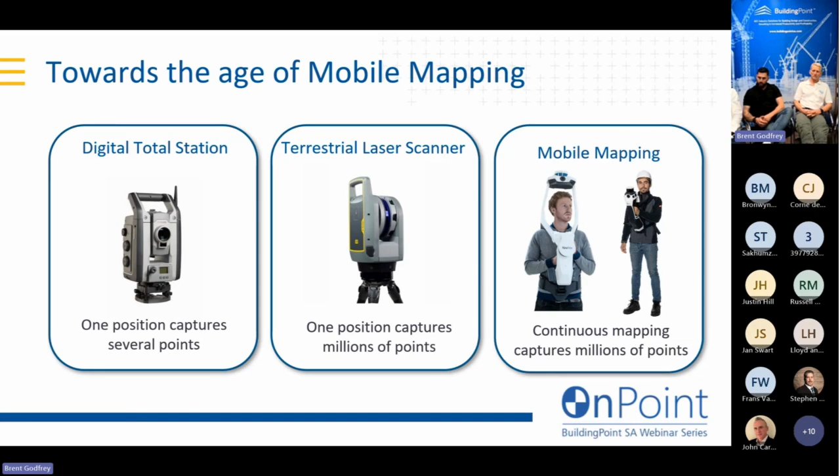I'm going to hand over to Sven, and he'll take you through their latest and greatest in that space.

Just quickly, I think it's actually quite a unique opportunity being here with a reseller and a customer. It's the first time I've done one of these with a customer sat next to us, which is great - it'll be good to see what you guys are doing a bit later on.

What I wanted to talk about over the next few minutes is that NavVis, going back to 2012, has been focused on delivering mobile mapping solutions, a lot of which you'd know, specifically around wearable solutions. The NavVis VLX2 and VLX3 are wearable devices that allow you to scan very quickly through your environment. Part of the identity and brand of NavVis was always to produce data quality more comparable to terrestrial laser scanners than what you'd expect from traditional mobile mapping systems.

Over the last 18 months our design and engineering teams have been working on a new product, a new segment, trying to compete within the handheld space. Over the past 10 years handheld scanning has become a lot more applicable specifically within AEC - you want to be able to move around these environments fairly quickly, and they're often quite small and confined.

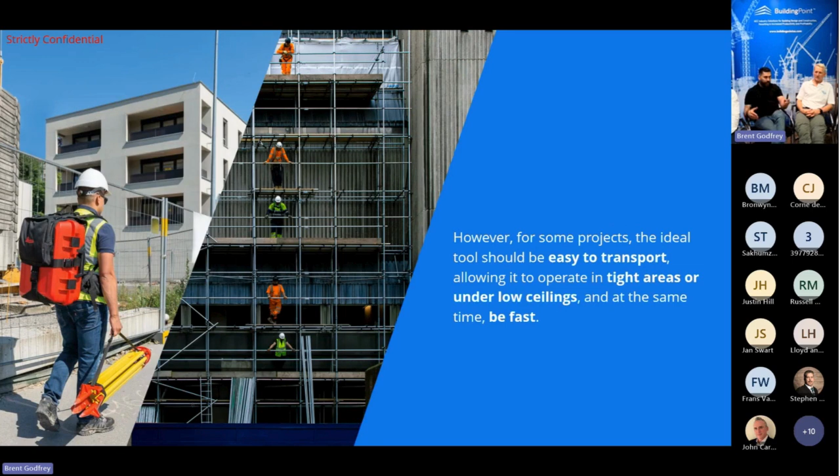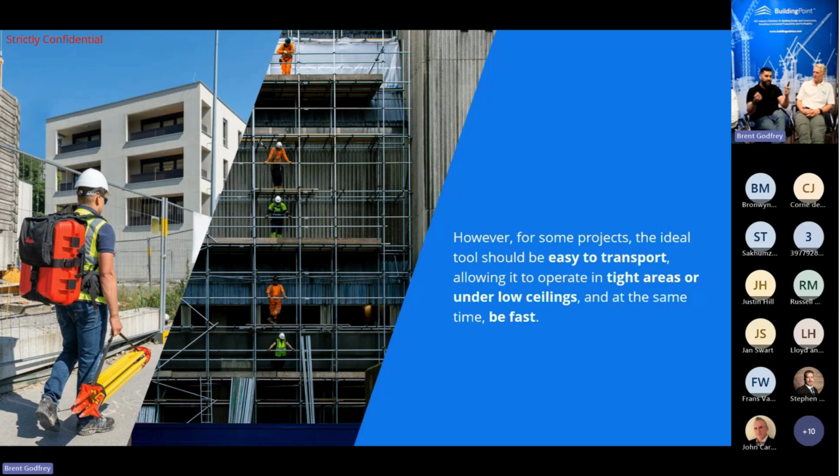However, some of the products in the LX series, the VLX 2 and 3, for some projects the ideal tool should be really easy to transport, quite dynamic to move around site, and pretty easy to use scanning in tight areas, as I mentioned earlier, AEC type projects. These are tight areas with a lot of complex features within the environment, but you still want it to be fast. You want to scan quickly on site, leave, get your data processed in a usable format, and hand it over to your clients. And the VLX, however being a really fast and robust tool, doesn't give you all of that dynamic ability.

So other companies and competitors have tried for years to meet two fundamental standards: scanning at speed and being dynamic, whilst meeting the data quality and standards you'd expect from your hardware. You guys paid a lot of money for these tools, they have to do the job you expect them to do. However, a lot of these other devices have kind of failed. You always have to sacrifice one for the other. If you're being really fast, you're probably going to lose a bit of your data quality and accuracy. If you're trying to produce really accurate data, you're probably sacrificing on speed. So where's that middle ground? I think that middle ground is what sets apart a really professional device from the compromise.

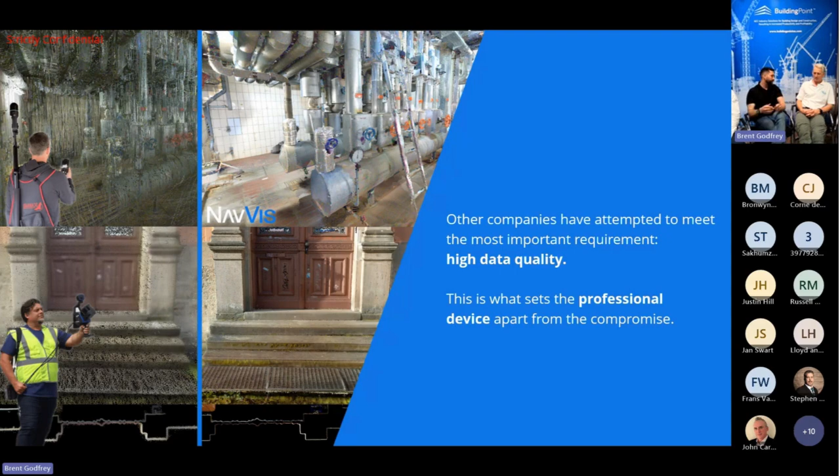So what we have done over the past 18 months is focus on trying to redefine the handheld reality capture market. Can we produce a product that gives you the benefits and value of speed, agility and dynamic scanning, but without sacrificing on our data quality? And that is where we have come to now with the NavVis MLX.

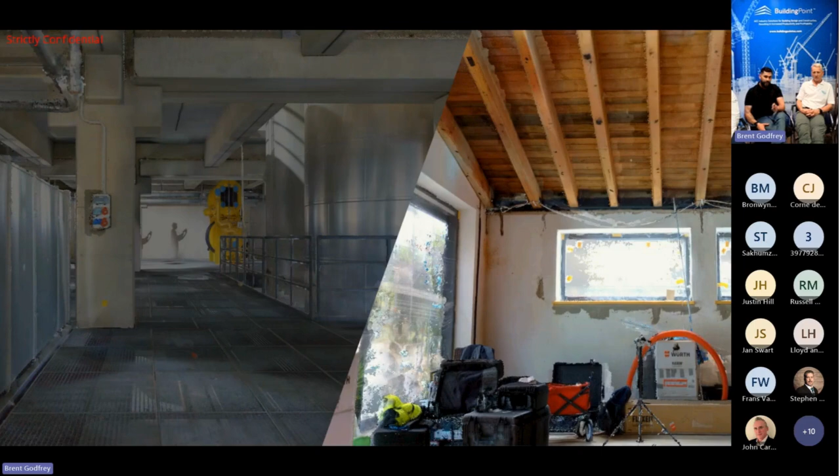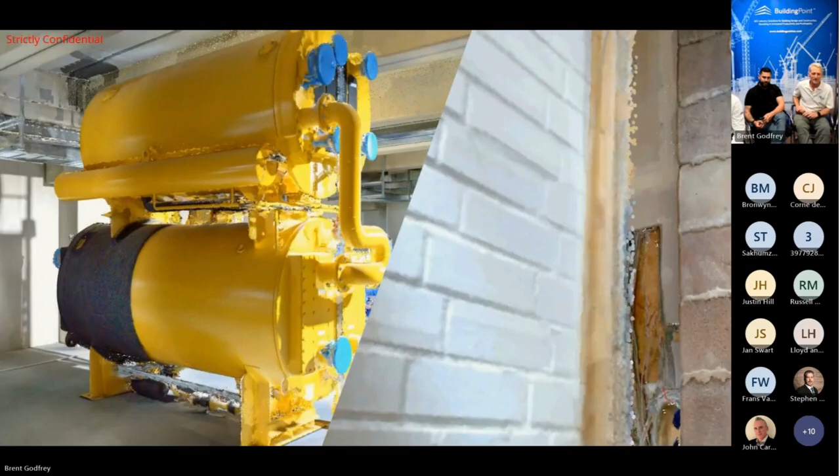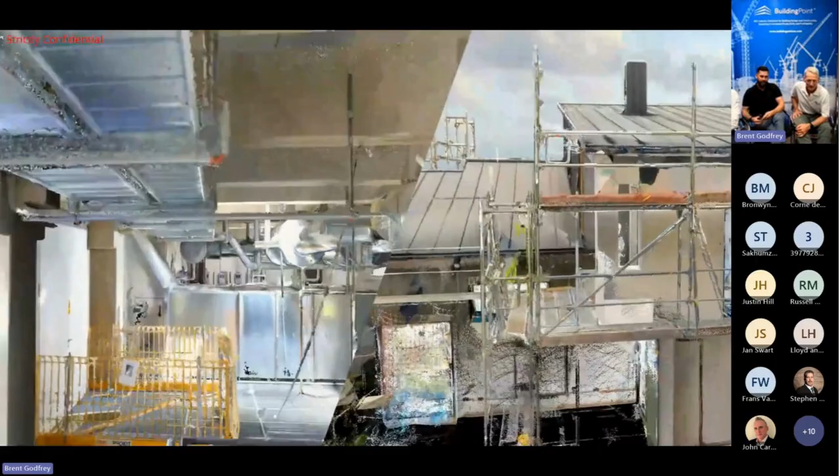So you're a user, left screen, right screen. Can you tell me which screen is a VLX or an MLX? We'll win a prize. MLX. I think left screen is VLX. That is just so good. Left screen VLX, right screen MLX. Oh no, that's just it's such good data. What's the vote? You are left screen VLX. Yeah, left screen. I think I'm going right screen VLX. I can't tell the difference.

So I'm going to happily tell you that none of you won a prize because you're all wrong. Both those screens have actually been captured with the MLX. So that kind of tells you, yeah, boom. That solidifies the story, right? We are producing products that produce incredible data quality, so hard to tell the difference between a VLX and an MLX when it comes to data quality comparisons. But I need to be clear that those two products, the wearable solution and the handheld one, are still fit for purpose. And I think you probably know this better than most - not all scanners can do everything. You need the right tool for the right job, and that's where the LX series becomes a line of products that helps you achieve those data quality results you're looking for.

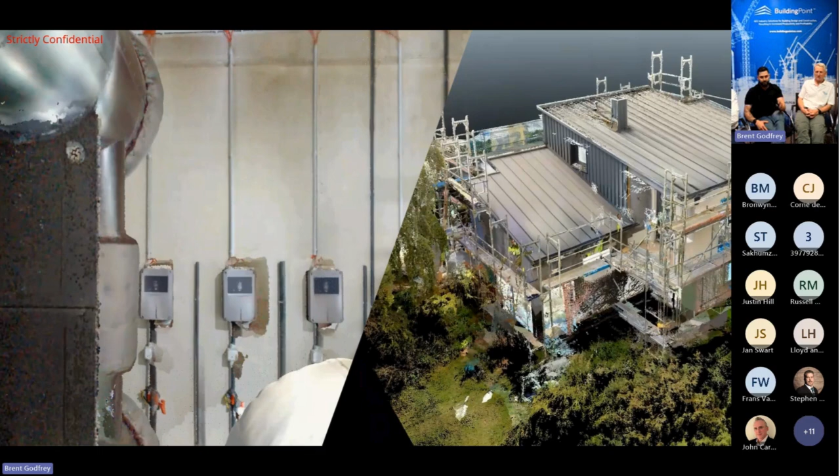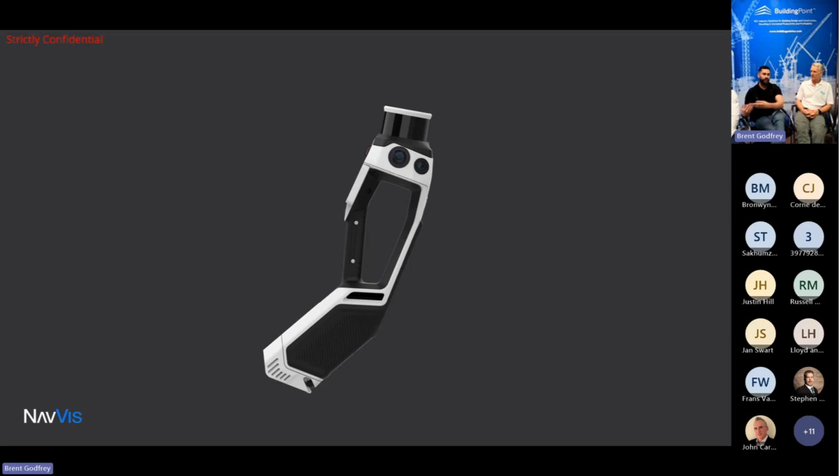So there it is, that is the NavVis MLX. That was launched in the first or second week of September, and shortly after that our major launch happened at Intergeo 2024, which took place in Stuttgart this year. So it's a product within our family now. It is a handheld solution that complements our VLX products, and our VLX products themselves complement the NavVis MLX. As I said earlier, this is absolutely redefining handheld reality capture, producing results that are extremely fast, but at the same time incredibly reliable.

So we can talk through some of the technical features. I know you guys as surveyors love to read into these details, and I think it's important that we do. But it is absolutely high quality data. We've got a stable 32-layer LiDAR sensor, some industry trusted SLAM software. NavVis has produced our own SLAM algorithm since 2012. It's trusted, it's reliable, it's dependable. You've seen the results before.

Exceptional point cloud quality from a handheld device. I think that previous slide with the side-by-side comparisons shows that there is not a single handheld device on the market that can produce that level of data quality and accuracy.

Obviously, to make that a lot more usable, you need some visual reference or some visual context. So we have 4 cameras producing high resolution 270 images. You can create a 360 pano if you lift the device above your head. Obviously, you don't want to capture your face in the photo, so lift it above your head.

However, we do have a fairly unique feature within the software that basically, if you're not taking a 360 pano and you are in the image itself, we remove that image automatically and we replace it with point clouds, so that you're not constantly in the scene. It's quite a unique feature. It's really helpful if you want to move around the environment quickly and not carry on having to lift the device above your head.

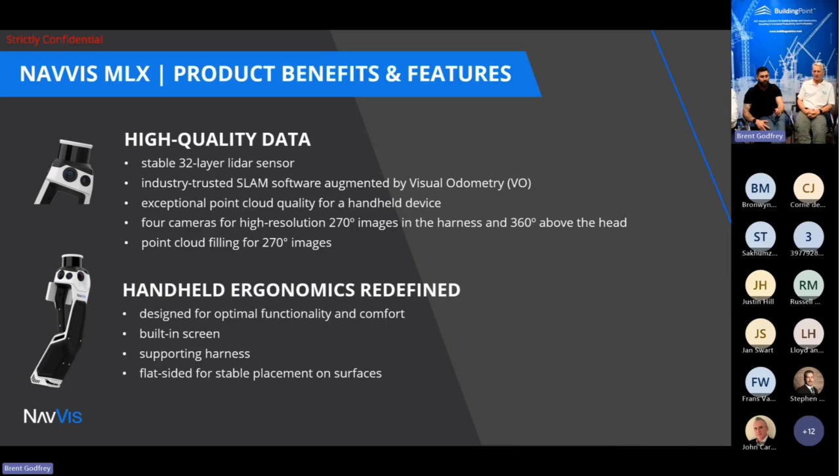It has been designed for flat-sided placement on surfaces. It sounds really trivial, but to be able to put the device down and know that it's secure, not going to roll off tables, is actually quite important. These are tools that you spend a lot of money on.

So, limitless mobility. As I mentioned earlier, this is now a compact device, which means that you can easily move this device around from site to site. It comes in a backpack. You can easily get this product into your hand luggage. You can move around very quickly. It is incredibly comfortable. The backpack itself, it's like walking around with your laptop bag.

You can get to site fairly quickly. You can go trains, planes, bikes, cars. We have a handheld luggage on flights. And then at the same time, you also get your hard case, your protective hard case in case you need it.

And then one of the really great features about NavVis tech, and we've brought these same features into the MLX that was on the VLX, is your geo-registration. So your ability to actually measure and control on site, which means that you're just creating a much more reliable and much more accurate result. That exact same feature has been brought into the MLX, which means that the consistency across all products is exactly the same.

And then you're ensuring complete coverage, as I mentioned earlier. The built-in screen, specifically if we think about users that aren't incredibly knowledgeable around the use or the understanding of survey, right? Often you want to give these tools to people to really quickly collect data, right?

So let's go into some of the specs itself. Without getting overly nerdy, the sensor is using a 32-layer laser scanner, a sensor called Hesai, and we are producing or collecting about 640,000 points per second.

We have those 4 12-megapixel cameras with the point cloud filling for the panos in case your face is in it. One thing that the MLX is doing that the VLX isn't doing, because the VLX has 2 sensors, we have incorporated 2 additional cameras on the MLX, which is called visual odometry.

So what that is doing is using visual features in the environment to supplement the SLAM. Those two additional cameras are not producing any data that comes into your final result. We don't process those images. It's purely there to add some additional robustness and redundancy to the SLAM to ensure you're getting an accurate result.

Current goal is 8 millimeters or less. We have an accuracy white paper that will be produced in Q1 of 2025, individually verified. We don't like to produce these things ourselves, but 8 millimeter accuracy on a handheld device is pretty decent. And then, like I said, we support adding control points using the same technology that came from VLX.

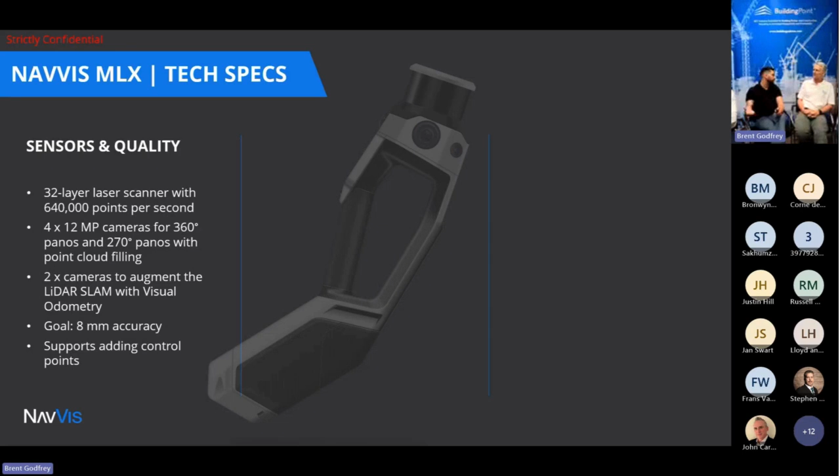Usage: on a single battery, over 45 minutes of continuous scanning with a standard 98 watt-hour battery. We do actually include a second battery, keep it on charge, and pretty much scan all day if you're cycling through these things. 10 hours of scanning with 250 gig external storage. 10 hours of scanning, and if you think about you moving at the same time, that is a lot of data. That is a big old environment.

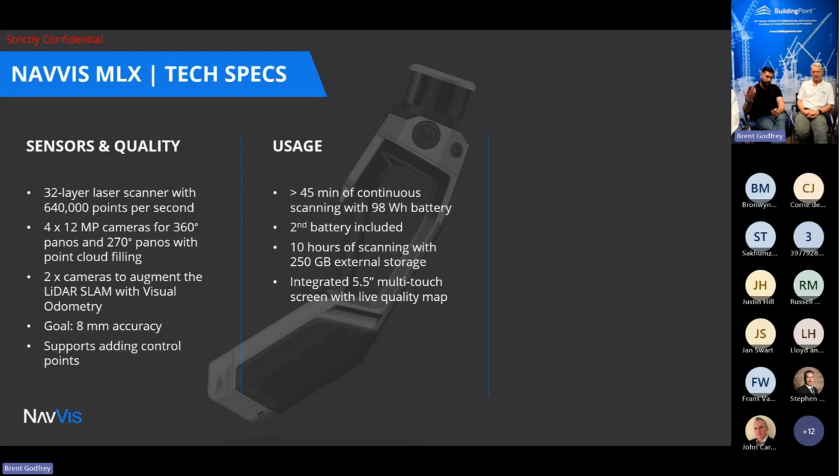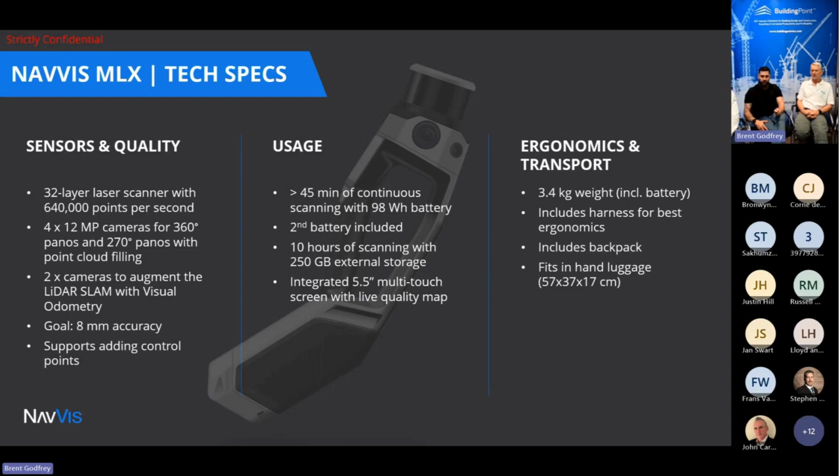And then the integrated 5.5 inch touchscreen, which is built into the device itself. Weight, just under 3.5 kilograms including the batteries. It actually includes the harness for comfortable mapping. Obviously the backpack is included so you can transport around, and then obviously the heavy transport case as well. So that is the short and sweet of the NavVis MLX.

Obviously, the BuildingPoint guys have their unit here already, which is exciting. Yeah, to get our hands on it. Yeah, I think I'll hand it back to you now, Brent.

Thanks very much, Sam. So I think we've now heard from the manufacturer. I think now it'll be always good to hear from the user, and fellas, if it really does say if it does what it says on the tin. And it'll be nice to hear from Ian just what he does in his business, how he has one of the VLXs and how it's improved, what value it's added to his business and what value it's added to his customers as well. So yeah, thanks Ian, thanks for joining us.

Thanks, Brent. We're a Cape Town-based firm of land surveyors in South Africa. We've been in this part of the world for the last 50-odd years with a proud history of traditional surveying, with a high commitment to accuracy and innovation and professional advice to our customers and clients. Obviously, as a firm of professional land surveyors, we cover the full spectrum, cadastral, sectional title, and onto the construction engineering side of it, putting in the as-built plans and completion certificates and signing off. So we do the full spectrum.

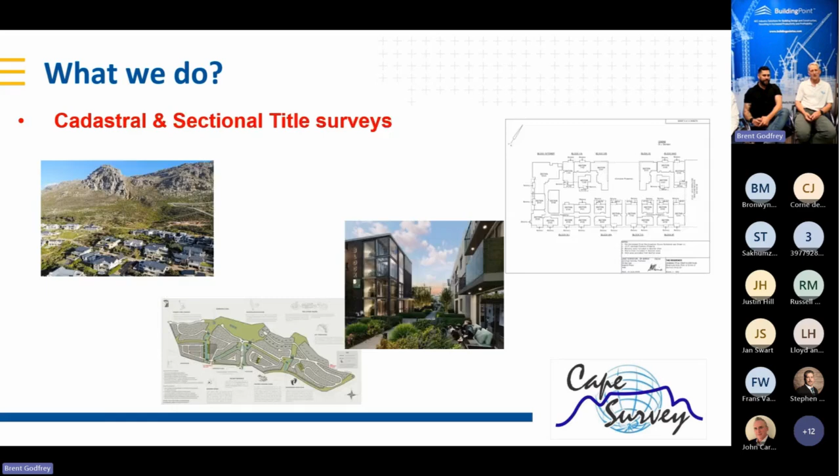We've realized in this that there are more advanced technologies coming out, and we've moved from the traditional theodolite, the steel tape, inverted image, through to this wonderful GPS side of things. And then later we've realized that scanning plays a really important role. That scanning we utilize both in the topographical and site surveys. With construction these days, it's so important to get as much data as possible, get it as accurately as possible.

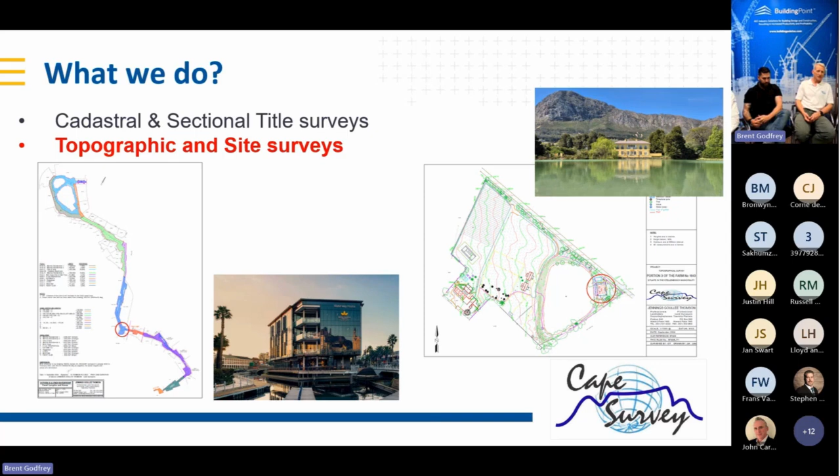With construction costs rising, it's exceedingly important to get this data over to the guys who are going to make the decisions on what happens on site. And scanning is the natural choice of going ahead and capturing as much data as you can, from the design side leading out into the construction and setting out of the new build that needs to be done. That is exceedingly complex these days with really difficult sites that we work on. And once again, using the right technology to get the stuff out of the ground correctly and set out correctly first time is just so important.

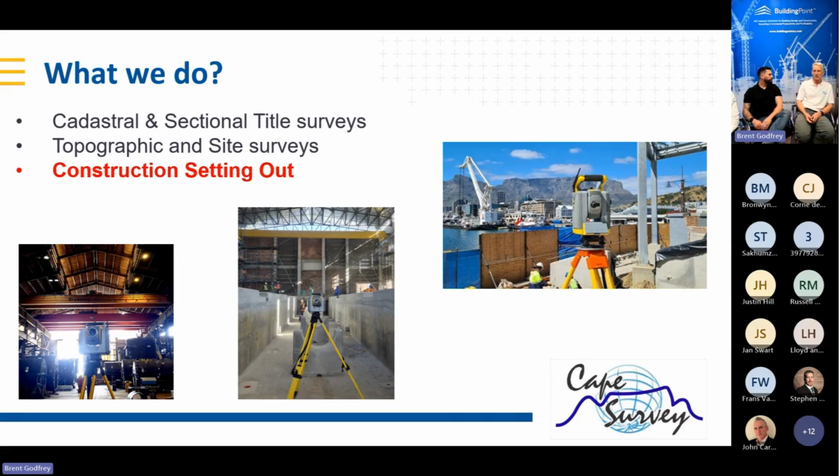This setting out for construction then leads us into the verification that the good old contractor has thrown his concrete where he is supposed to have thrown it. That verification can go from a whole building where all the elements are identified and extracted and compared to the design positions, to your traditional floor flatness scanning, where we reduce the point cloud to every 100 mils instead of every meter, and generate floor flatness plans, which one can see if it meets client spec or whether it needs remedial action to sort it out. And then our little problem child, every site has a lift, and they managed to get them wrong.

So verticality analysis, see if it's going to work. The lifts, as you know, are ordered many years before the project, and now it doesn't fit. So yeah, lifts are one of the real bugbears on it.

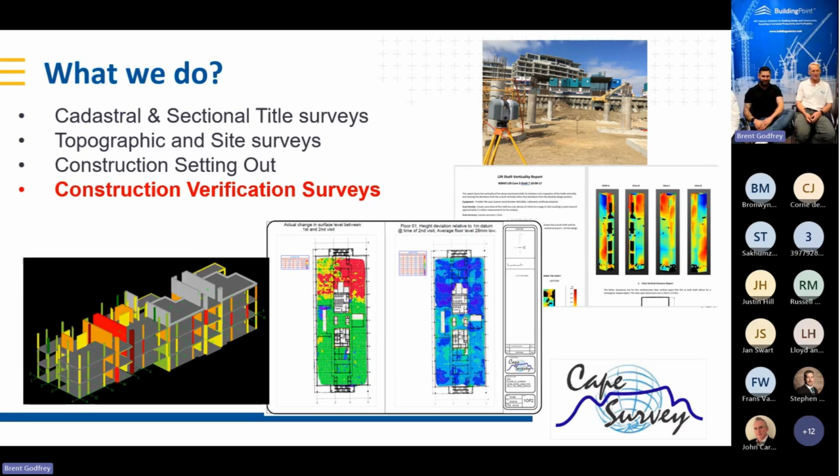The scanning also helps us with the volumetric surveys, which we do with stockpiles, and the budget being what it is these days, it's just more and more important that our client gets the right volumes, and the only way of doing that is to scan it. The old days of running around with a theodolite and taking a few spot shots don't cut it anymore.

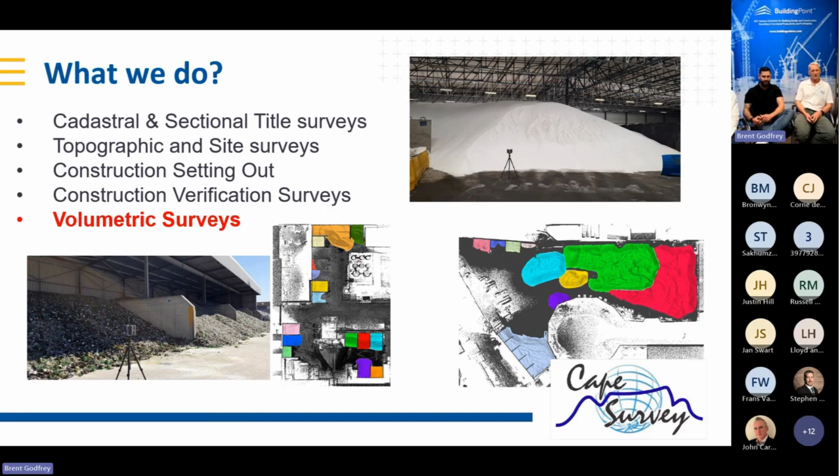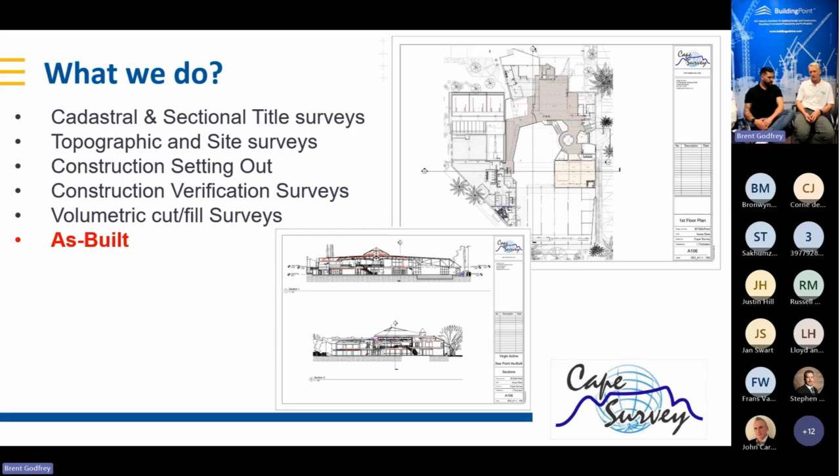Another aspect of the scanning is producing as-built plans. These days, people need this for record-keeping purposes. This generally focuses on 2D plans, floor plans, sections, elevations, the typical things that would be part of a record. The level of detail required on those plans is only possible through scanning. To sit there with a tape measure just isn't going to cut it anymore.

The next level from that is the BIM. Scanning, again, a lot of it in the architectural space, but even more so these days, the structural side of things, the HVAC systems, fire, are all needed. And once again, the only way we can do this is scanning.

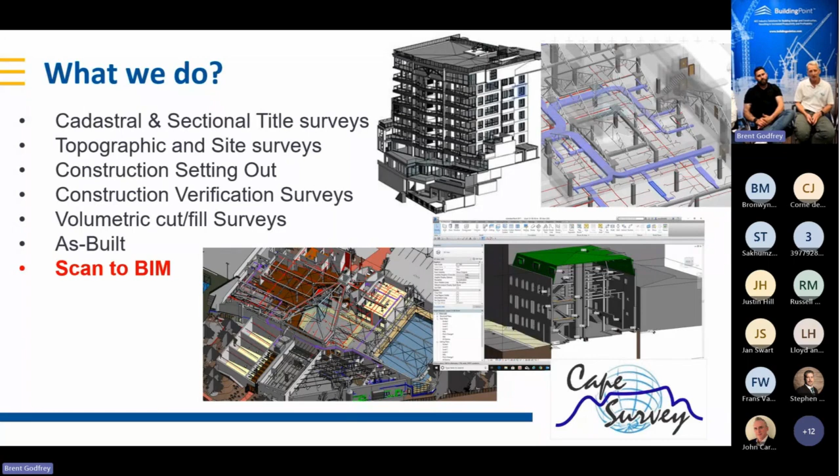So the model verification is also very important. That model that the guys generate may not be done from a scan. It might have been from as-built drawings of a building, either in PDF or DWG formats. It might have been collected with an architect, using a tape and a disto. So it's exceedingly important to take that model and verify that it is actually correct, that it matches the building. In this case, we scan the building, drop the model into the point cloud, and then verify that the building is correct.

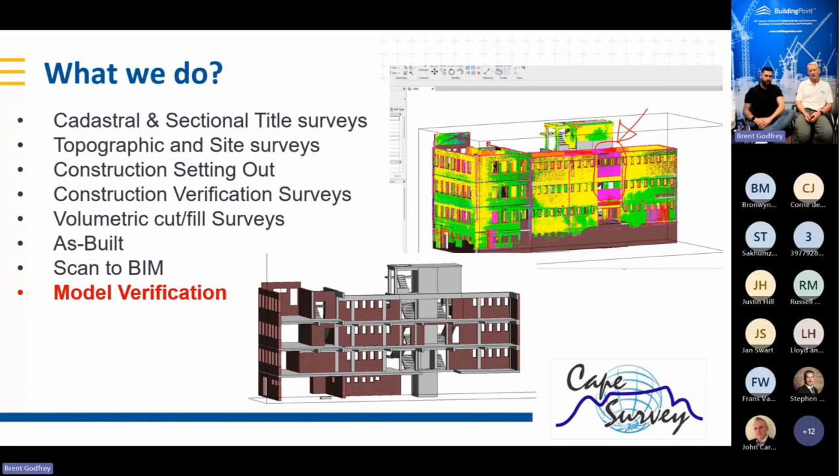So as you can see from our history, we've grown up with scanners. I think our first scanner was in 2012, 2013, somewhere around there. But we soon acquired a fleet of these little scanners. They are exceedingly useful. And as Sven mentioned, there's no scanner which does everything - unfortunately, there's no scanner to rule them all.

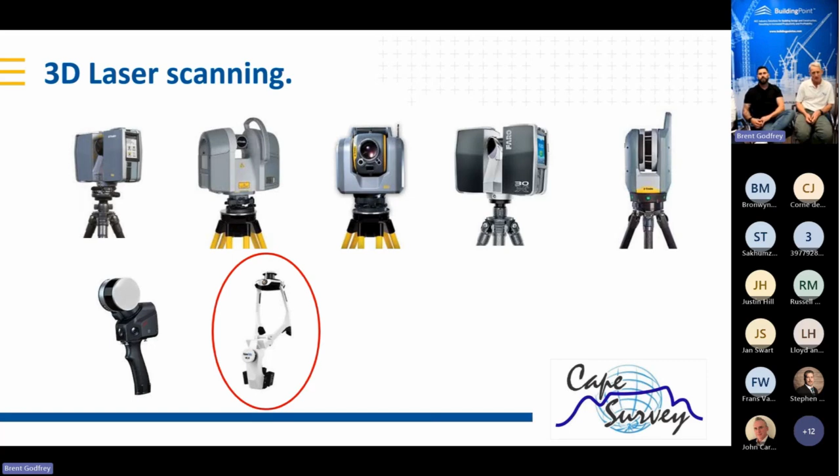So we acquired a number of static scanners, and then very recently we moved into mobile scanning. Our most recent addition to our system is the NavVis VLX. That's proved to be an amazing scanner. It comes in two formats, two sides to it: the VLX is the hardware, and the NavVis IVION is the software. And both of those aspects have incredible benefit, both from the surveying side and also from the customer side.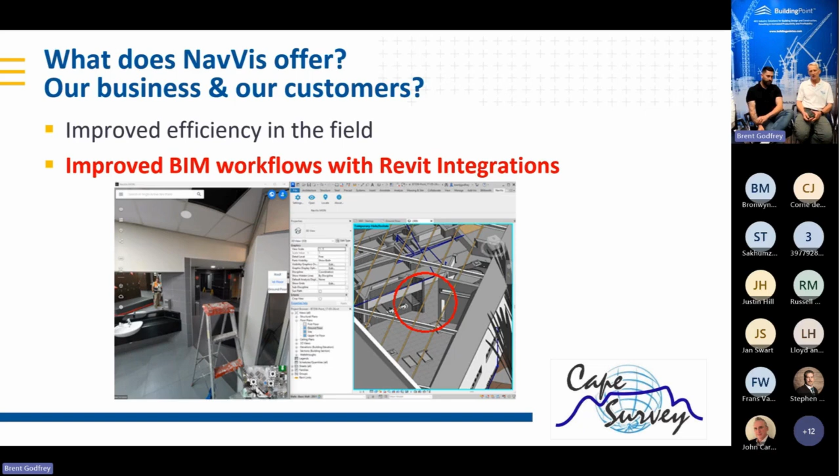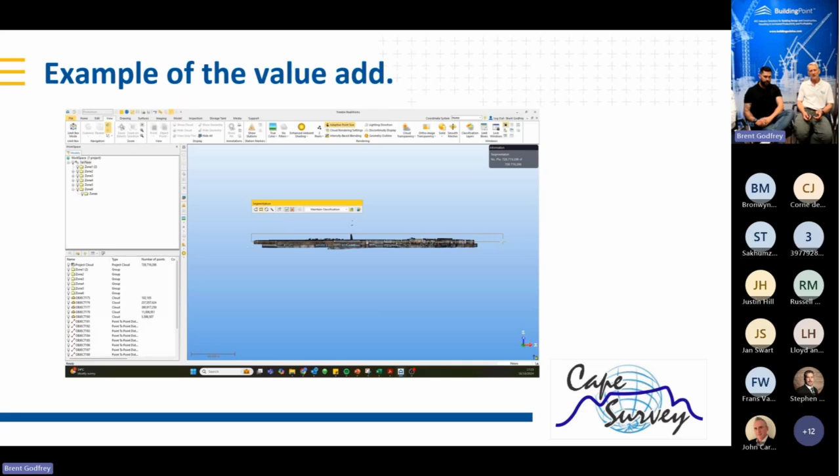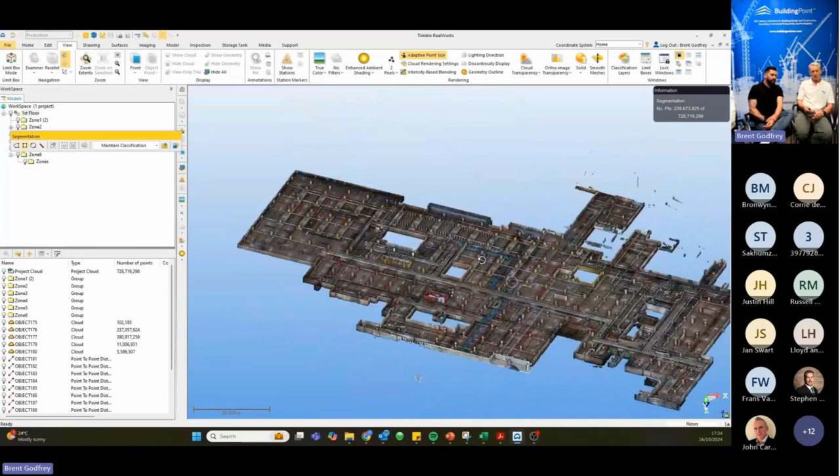From our customer's point of view, this is now the interesting side of it. They get value add for what they're wanting. That IVION system in itself is a wealth of information. What happens here is an example of capturing data, and this then gave value add to our customer, because without changing their requirement or their deliverable, we were able to capture the product, process it, and then generate what they had asked for. The quality of this point cloud, the level of detail that we captured, and the speed at which we captured it, is just not possible in any other way of producing this in the tight timelines that we stipulated.

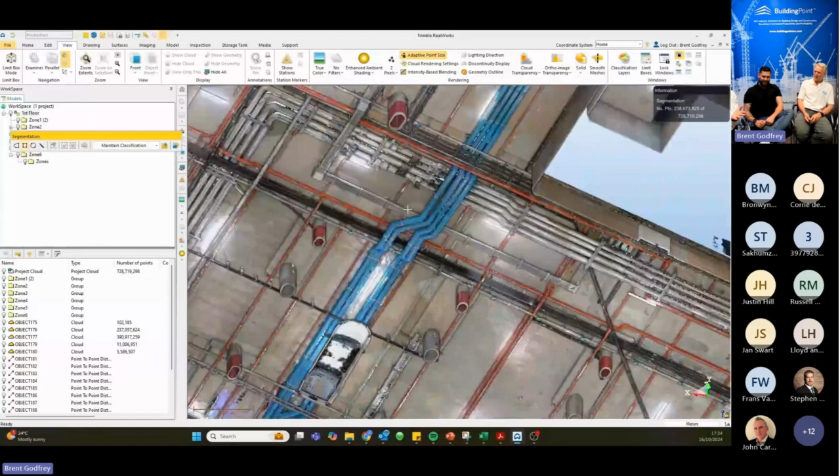Just look at that data set, it just reminds me of projects done in the past. There's no shadows, it's just so complete, that's the thing that stands out. You watch the scanning as it unfolds on the screen, you just take a step, half a meter to the left, fill in the gap, move on down. Every aspect of that product gets captured, exceedingly well captured.

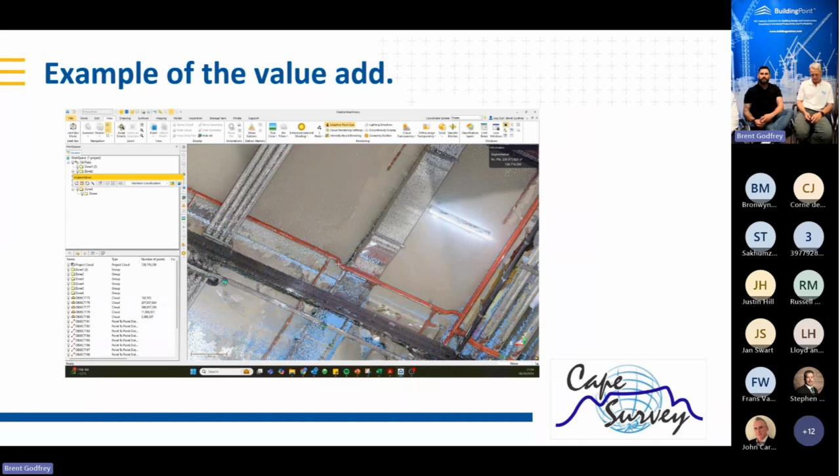From that, we were then able to generate the required deliverable. They wanted PDF, DWG of height clearance tolerances, and that was what they wanted, which is fine, we can deliver that. But then, as the saying goes, but wait, there's more. There's a whole lot more.

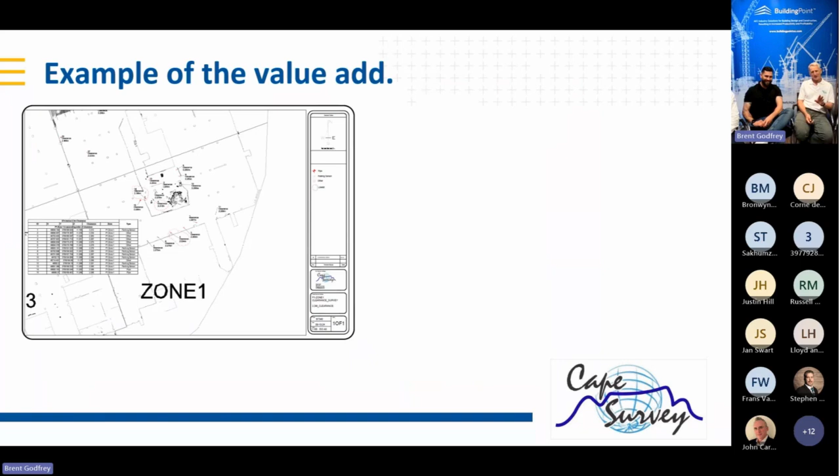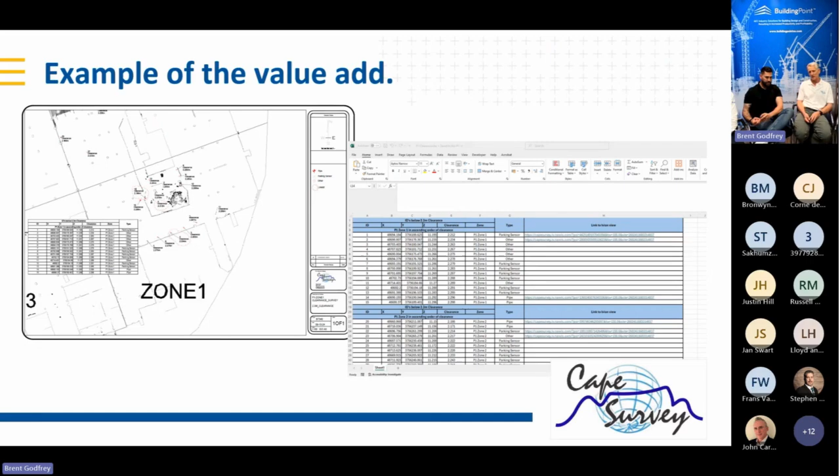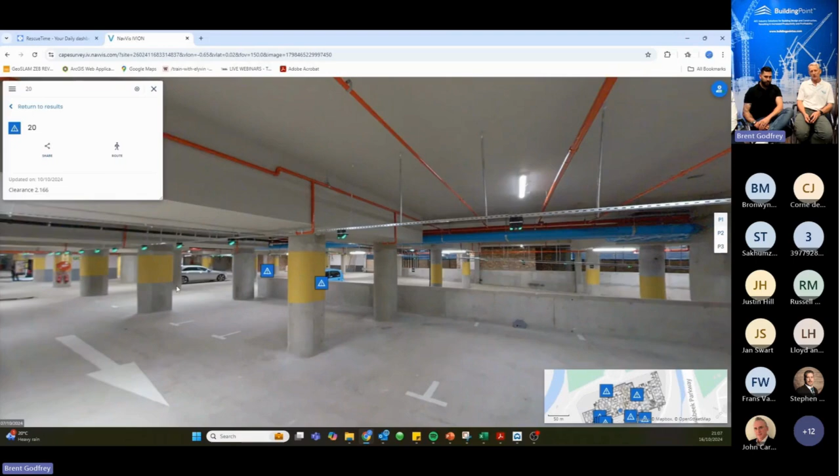So attached to that, we then gave them a spreadsheet showing the points that were not within tolerance with a little hyperlink on the side. And that hyperlink, they could click through using any web browser to the IVION site. So if they now want to see a point which is not within tolerance, they can jump immediately to that point, and it presents it. That's your point, not in tolerance.

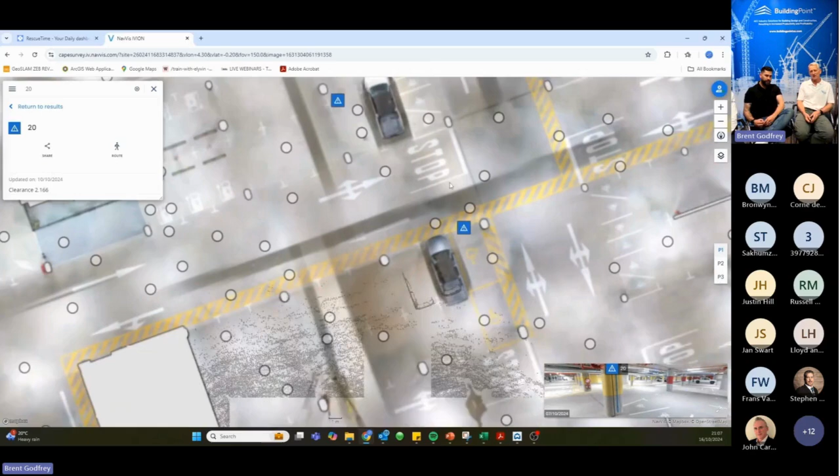So they can do a site inspection from a virtual office. They can literally see what is on that site, the digital twin, here's your data captured. And in our case, very little extra cost. We had to scan it, we had to process it, we had to extract it. There's the data for the client.

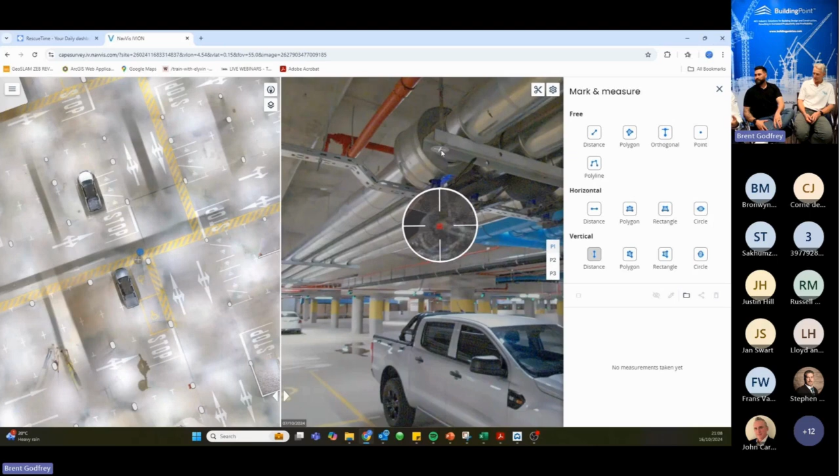I think what's very nice with that as well is that you've delivered them an Excel spreadsheet and a PDF, and there's no intimidation about now delivering them something new that they have to overcome and learn. You've given them a spreadsheet and linked them into something like this, and now I've got this user interface as a value add without being pushed back. It's not a sell.

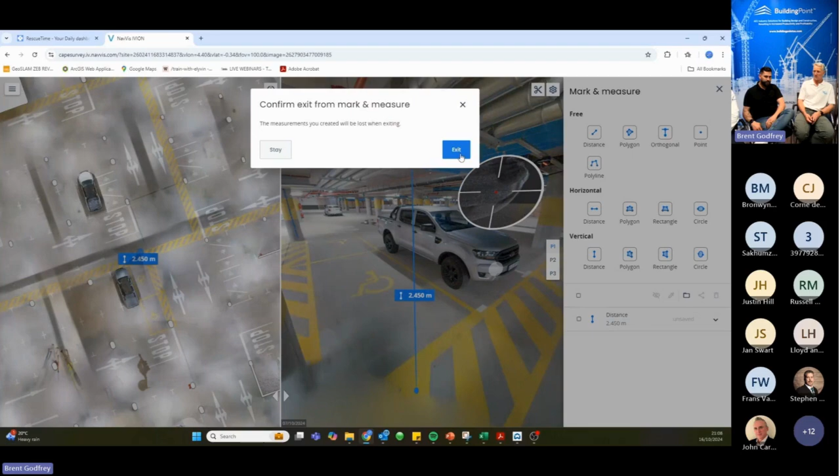Yeah, we found it was so interesting. We gave this to the guys, they analyzed what they wanted to do off the spreadsheet. And in the IVION system, you can set up various user levels. This is hosted on an Amazon web server, so it's as secure as Fort Knox. And then the user levels, you can have viewer, admin, because you don't want people climbing inside here and breaking the system. So from that side, we then issued it, and we found that the most unusual folk were actually wanting to start looking at this and taking measurements. It wasn't just for the design team that wanted it back off.

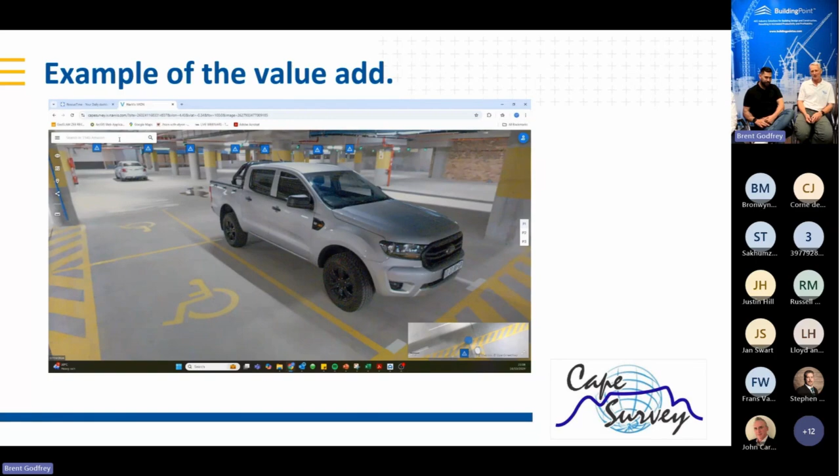Suddenly this opened up all sorts of new aspects for them, so once again, value add to the client. They were exceedingly happy to get the results within that time frame. There was no way we could have scanned this traditionally with our TLS scanners. So the mobile side of it cut our scanning time to about a third. A third of the scanning time we did that in. Those floors are 12 to 15,000 square meters at a time, and we knocked that off in a day, just under a day, to produce that.

And then the processing, analyzing gave the results, and the clients came back saying wow, hopefully they don't have to pay for it, and I said you already have. So it's part of the package. Happy clients, impressed clients, clients that are coming back for more. They're now starting to ask for the data presented in this manner. And for us, it's been an amazing tool, both from the surveying side, processing and delivery side. It's filled all the boxes for us.

What I find quite amazing about this whole thing is that you don't necessarily know what sort of clients are going to be using this data. So the clients might not necessarily have a big, powerful, fancy laptop or PC that's going to be able to handle this sort of data set, and what's incredible is that they can just view it off a web browser. Unfortunately, an internet connection is still required.

But so you think about the users in itself, right? Within IVION, you are able to view the point cloud and utilize those types of tools, but not everyone even understands what a point cloud is, right? So a lot of guys, they can click and just extract just that little section that they want, so they don't have to puke on billions of points. There's a reason, yeah, it works exceedingly well.

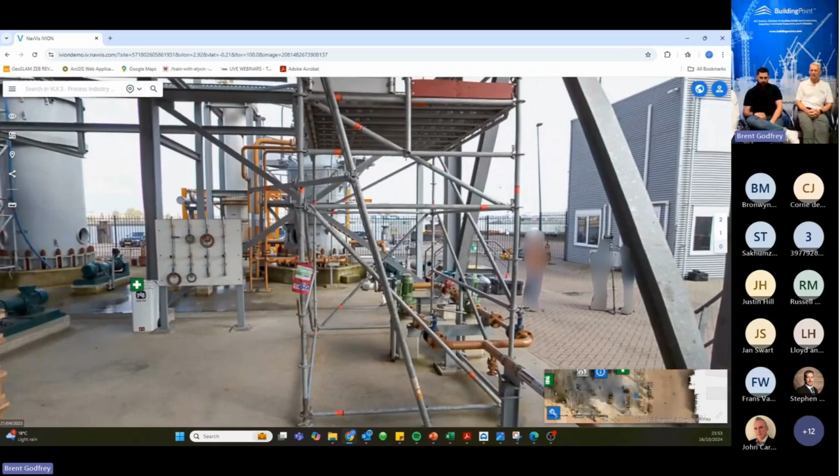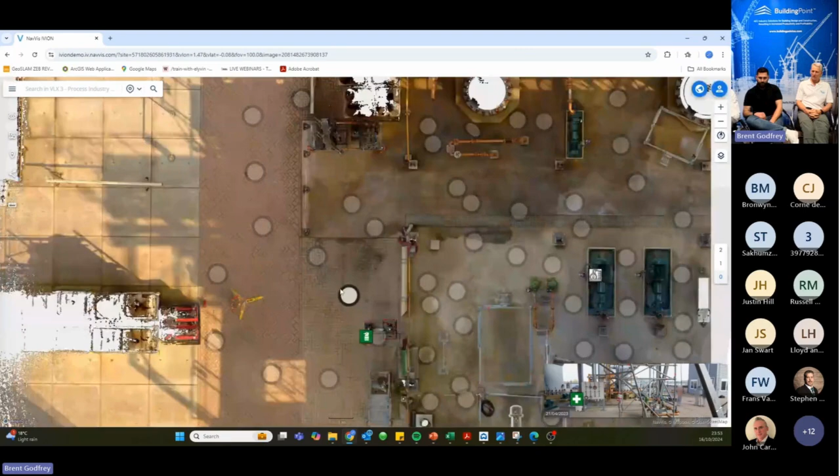It looks like a Google Earth user interface. You can see your sites and easily jump into them. On the right-hand side, everything is split up onto a level, so you can navigate your first floor, your second floor. While capturing data, this is what the device shows—it splits things onto levels. While processing, you can also redefine the levels of your project.

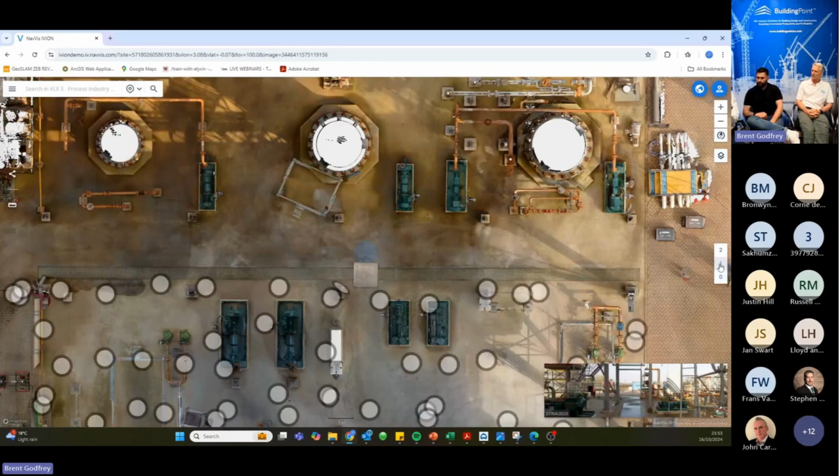Navigating to different places, every time Ian presses a button on his VLX, it captures one of these panos, or bubble views, as people are used to the term. You can jump into one of those locations and see the 360 imagery around you. You can see the split between the 2D view and the 3D view, and toggle between them as you go around the site.

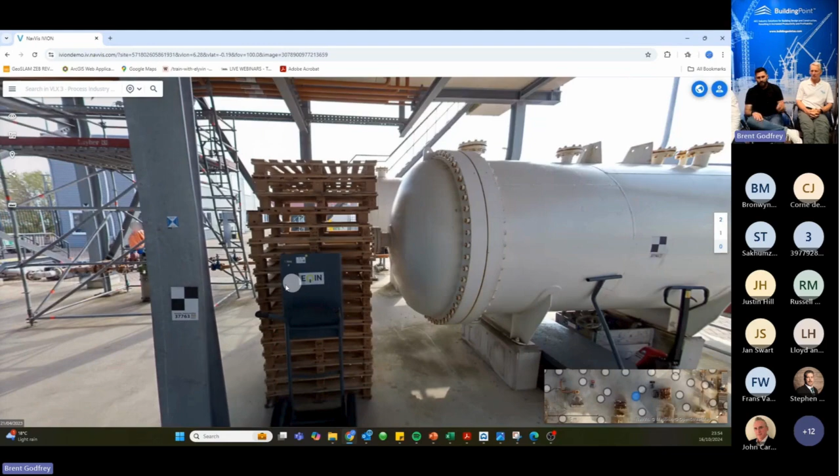I think there's a valuable point that Ian made earlier—this is a web browser, a simple web browser. There's no local installations of crazy software licenses on your PC, no specific seats, no specific laptop being traveled around between teams and individuals.

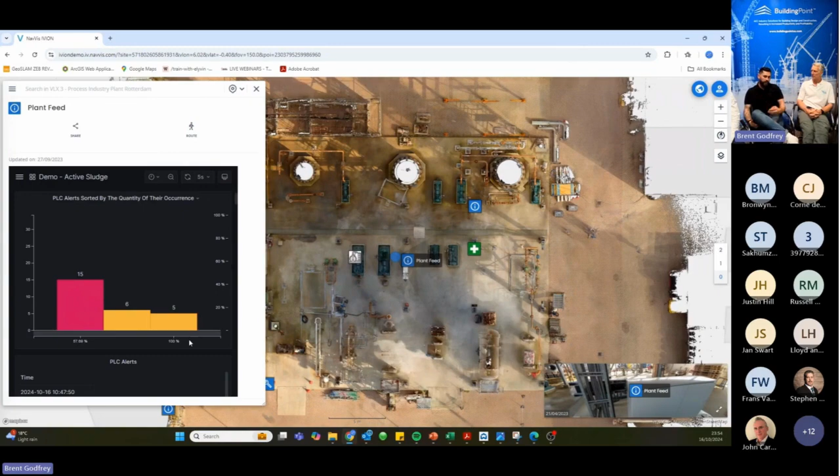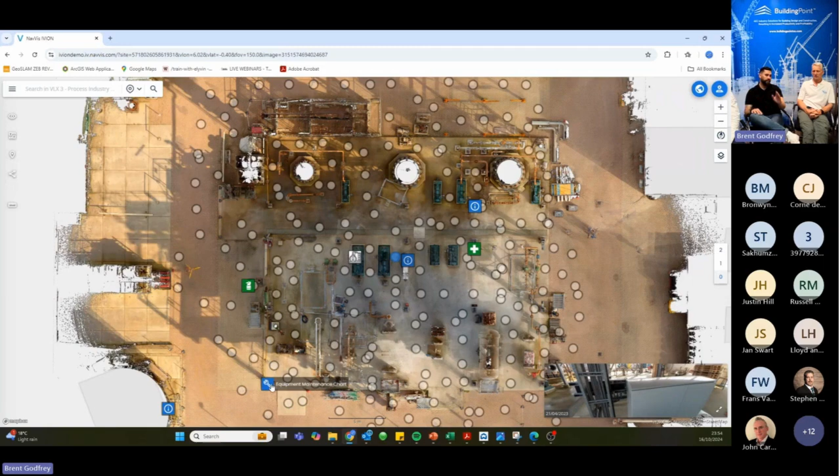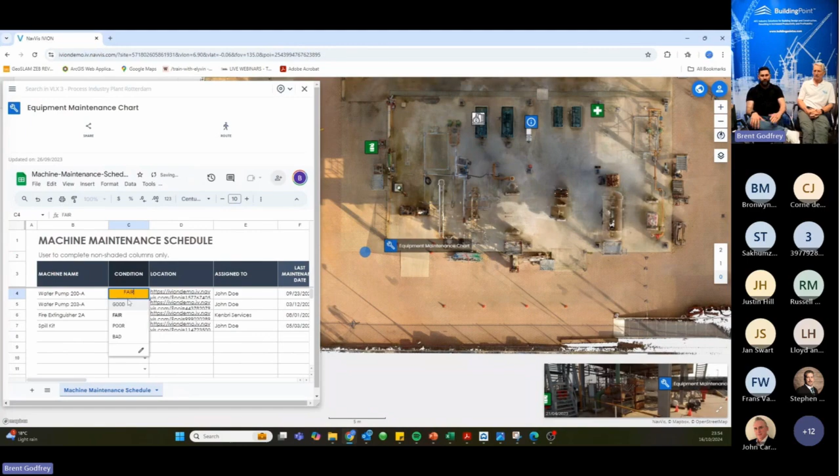The great thing about a web browser based platform is that a lot of these times, especially since COVID, you have teams that are absolutely remote. You might have a team in Joburg looking at structural stuff, and a team in Cape Town looking at other functions of the site. All of those teams and individuals have access to the exact same information at the exact same time, without going through crazy IT infrastructure. It's just type in a web page and have access to all of that information very quickly.

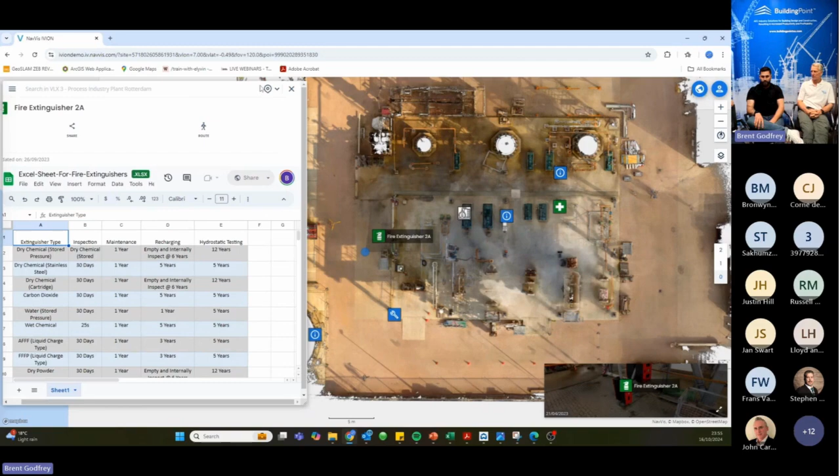Ian showed by highlighting these points of interest—you can see in this video a bit more. You can take it to that next level; it doesn't just have to be this. We've linked in IoT sensors, so there are vibration sensors on the plant or something like that, and it can be turned into as big or as small as you like. The client can start to add information to it.

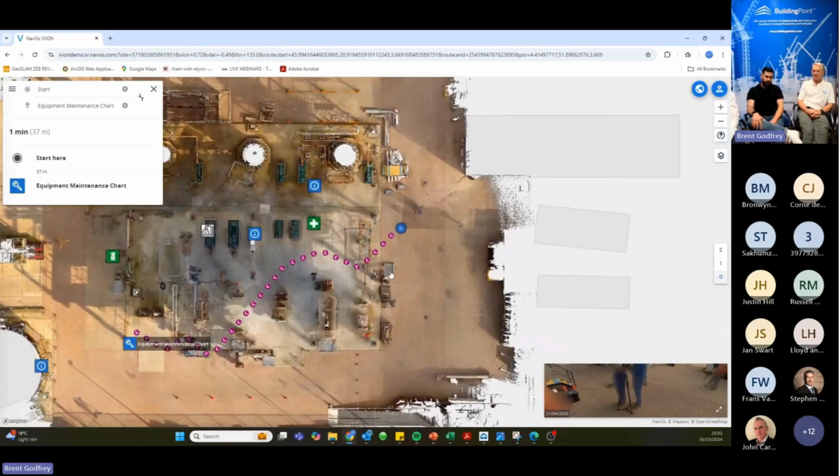You can tag live video feeds, maintenance schedules, documents—you can see here on this. You can even do navigation, so you can navigate between these points of interest. It can be used as an indoor navigation tool.

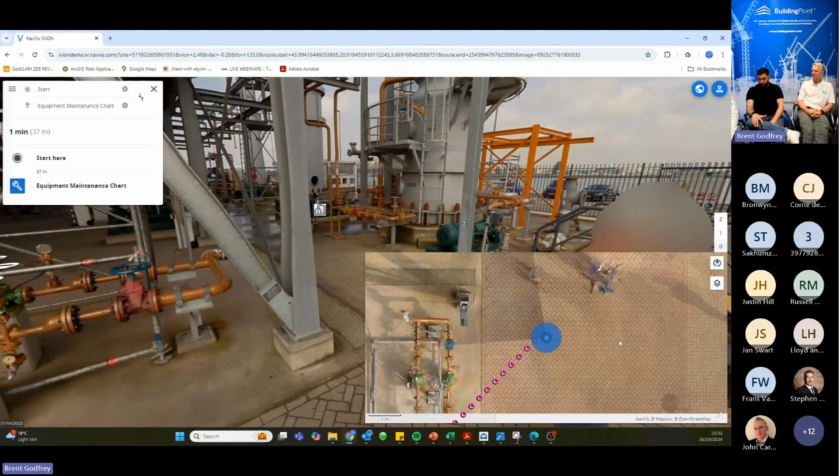There's a new application called Ivion Go—Ian actually spoke to us about it. NavVis Ivion Go is an app that we've released in the last few weeks, around about the same time as NavVis MLX, which essentially gives this to people on site through a handheld device.

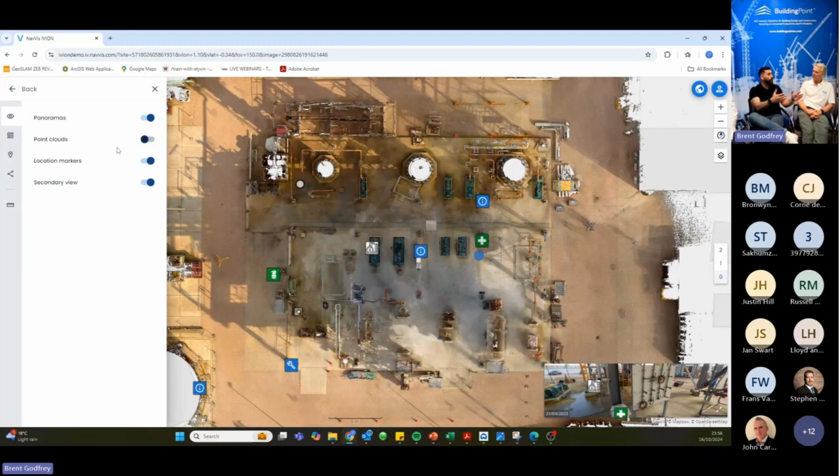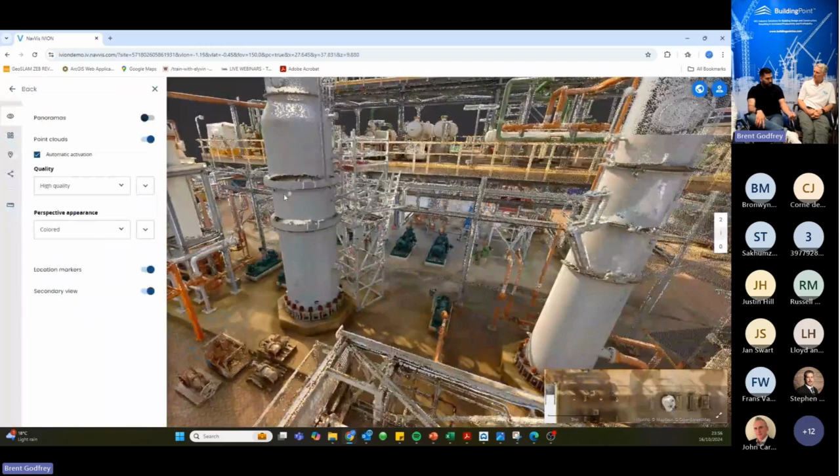The same types of features allow navigation from one specific asset or point of interest to another. It's a really powerful tool that, from your client's perspective, is another value add. They can start to really utilize the platform within their own maintenance schedules and plans. And there's the ability to add additional context to things already scanned - you can go back to the same asset and add more information and tag it.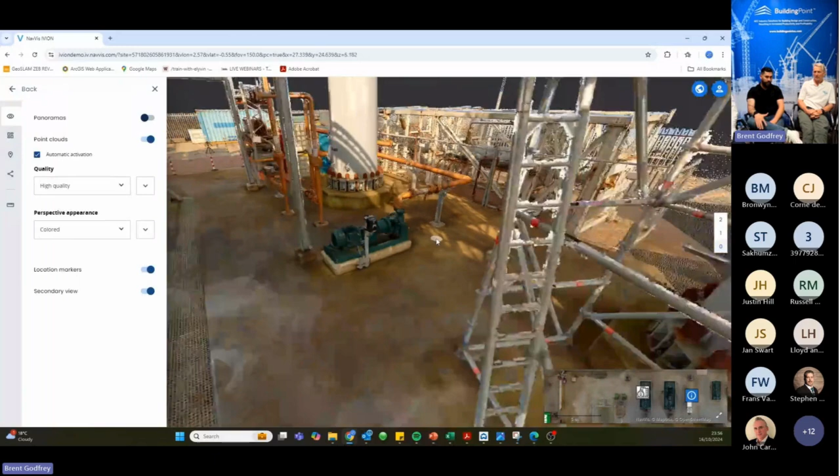It's all cloud-based, so very collaborative in nature, and that navigation tool is really useful. If you're sending a maintenance team to look at a specific machine, someone who's never been there before, a simple feature like that can be really powerful. And from there you can take distances, measurements, areas, and do all that interrogation.

Yeah, very useful tool. So it's very easy to navigate. If that answers the original question.

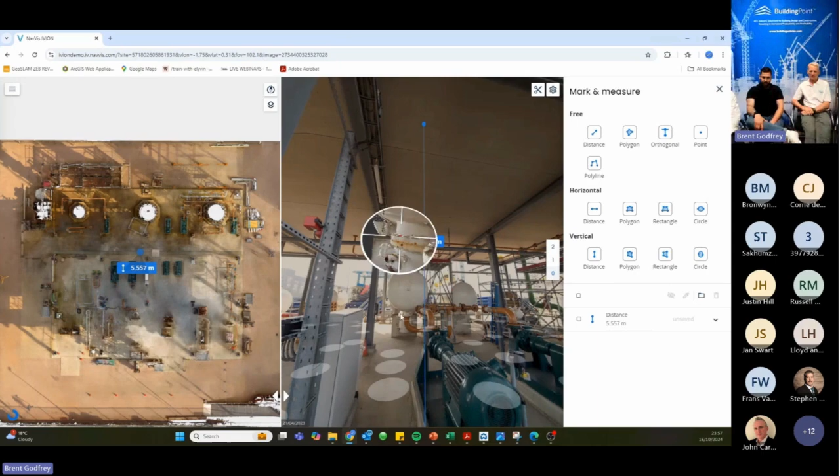Any more questions? Yeah, there's another question here from Sakunti Tima: Do you need to take control points to process the captured point cloud, or does it come ready and accurate? And does it get affected by weather or cloud coverage?

We'll start with the control point question. In essence, yes, you can capture data quite accurately without control, however it is absolutely advised that you include control points. I like to use control - you know what the data is when you get your control out. Either there's a problem with the control or a problem with the data. If you're running blind, you don't know.

It's a general rule of thumb that control means you have absolute confidence that it is to the level you'd expect. And it assists in the processing as well - it adds that additional layer of redundancy when processing those data sets. So yes, I would absolutely say use control capture.

On top of that, it gives you a very good quality report. Because you've done control, you can prove the quality of what you've done is correct. There's a QA/QC report showing deviations between your control and your SLAM data, so you can confidently say I know it's right and have a record for my QA file. What was interesting on that project is the raw data, when uploaded, gives you a projection of what's happening. My worst error was about 13 millimeters over that entire 140-150 meter stretch.